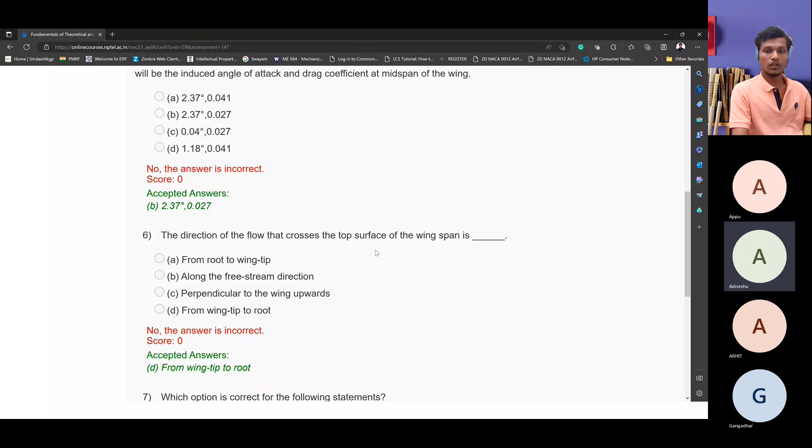Yes sir, you are sure? So I will... that one flow from leading edge to trailing edge, sir? It's not - he is not asking from leading edge to trailing edge. He is just asking how the flow will cross on the wing, whether it crosses along the span from wing tip to root, or root to tip. They are asking about the wing.

So wing means, let me clearly draw the picture and I will show you. Okay, are you able to see this PPT? Yes sir, yes. Okay, if you see an airplane wing - I'm not able to draw very neatly, but kindly adjust with me.

If you see the airplane wing like this, so this is your wing, right? Yes sir, this is the flow you are able to see. So wingtip vortices - the possibility of forming the wingtip vortices is from root or the tip? From the tip. Yes, from the tip, so the flow will move like this because of this wingtip vortices.

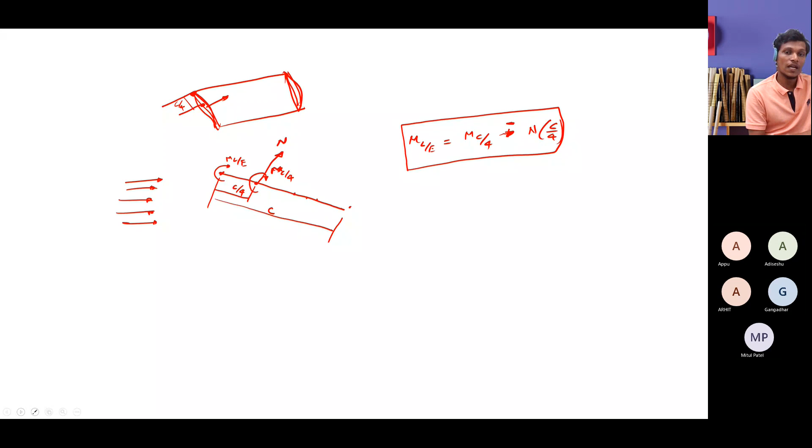Then we discussed a doubt raised by one of the students, who asked how to calculate the moment coefficient about the leading edge. In today's problem session, Professor Arnab Roy also discussed how to calculate the moment coefficient about the leading edge, and how the moment coefficient and lift coefficient together give a more detailed understanding of airfoil concepts.

So then we discussed the continuity equation in integral form, and applied it for one-dimensional problems, following certain sign conventions. We get that A1 V1 equals A2 V2, which is a very basic fundamental equation in fluid mechanics, known as the continuity equation in one dimension.

A1 V1 equals A2 V2, relating area and velocity between two points, but the conditions and assumptions behind this are very vast, so we need to carefully apply this equation. If there are experimental or real life situations where we can use this equation without significant loss of accuracy, then we can also apply it in the Bernoulli equation.

Once you apply this in the Bernoulli equation, you get a format of stagnation pressure and the relation between stagnation pressure and static pressure, like how stagnation pressure in incompressible flow converts to static pressure and kinetic energy. This is an important relation, and one should understand its derivation.

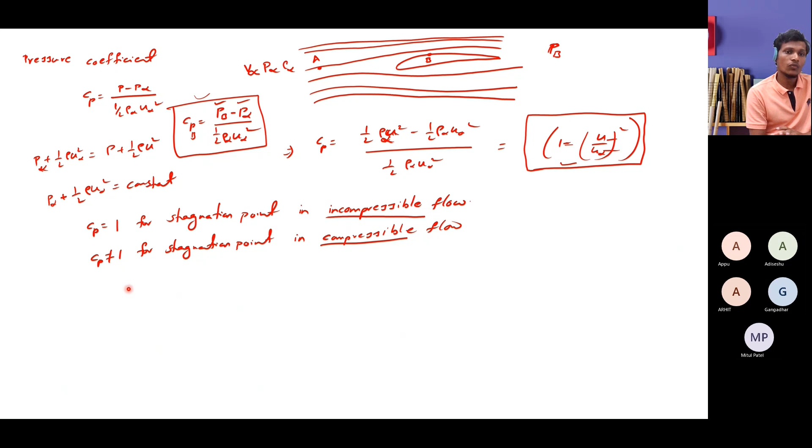Then we discussed, based on static and stagnation pressure, that instead of dealing with absolute or dimensional parameters, it is always encouraged and a common practice among aerodynamicists to work with non-dimensional parameters, like the pressure coefficient Cp.

If you have a pressure on the aerofoil, like at point A and point B, because of the properties at point A, which is the free stream with uniform flow coming onto the aerofoil, you will see changes in pressure, velocity, and flow properties on top of the aerofoil. These properties are governed by the Navier-Stokes equations, involving momentum conservation and mass conservation.

A very common definition we always use is the pressure coefficient, Cp equals P minus P infinity, divided by half rho infinity V infinity squared. And you can also include this using the continuity equation.

That is, A1 V1 equals A2 V2 for the one-dimensional form. If you include that in the Cp definition, you can also get that Cp equals 1 minus u by u infinity, whole square. This is also a formally important way of obtaining Cp.

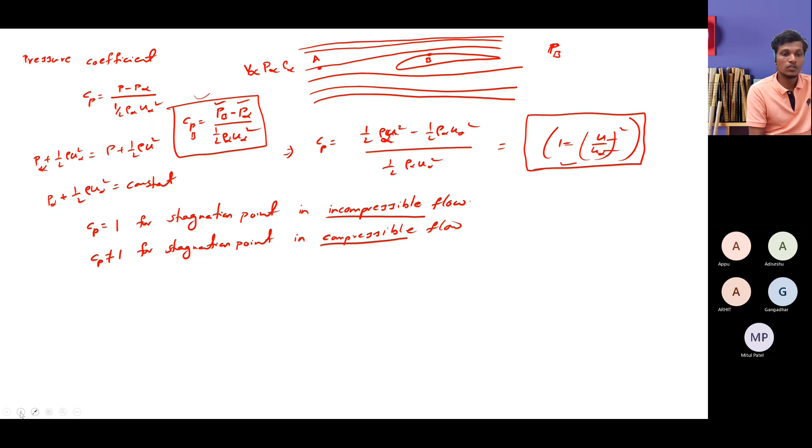I think you already covered this in the lecture sessions, but this is just a recap. If you have followed all the lectures in detail, you have already seen the application of Cp equals 1 minus u by u infinity squared in flow over the aerofoil or thin aerofoil theories, calculating the pressure coefficient in a derivational sense. You might have already gone through those lectures for better understanding.

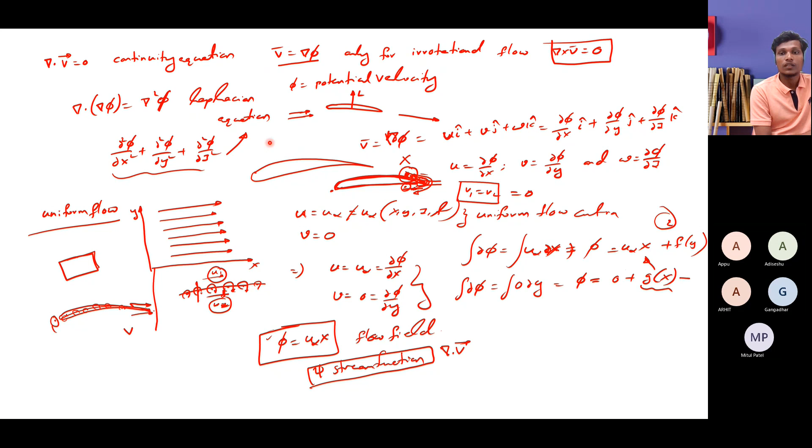Then we also discussed what uniform flow is, what the Laplacian equation is and how it is formed, and what the velocity potential is. These kinds of things were all discussed.

Now we will see today... let me take my pen. Okay. Can I use another?

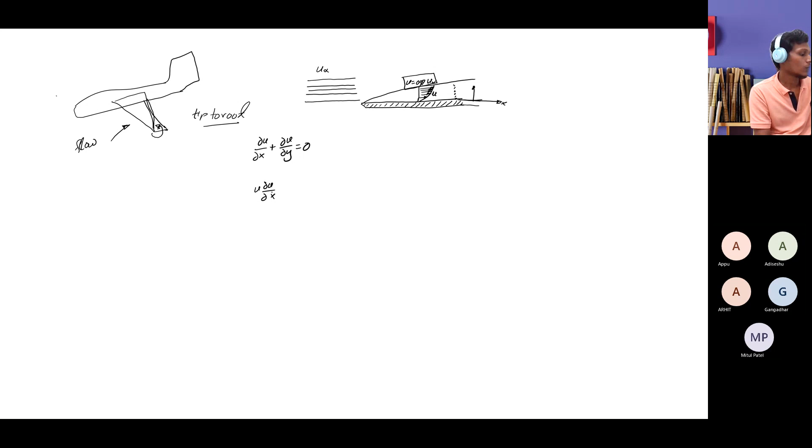The momentum equation becomes u du by dx plus v du by dy equals minus dp over dx plus 1 by Reynolds number times d square u by dy square, where this is the x momentum equation.

And for the y momentum equation, everything cancels out. Only dp by dy equals this remains for the flat plate, that is, the pressure gradient in the y direction is 0. So these are the governing equations of the laminar boundary layer.

One can solve for the boundary layer features using these equations. We can solve, and formal solutions also exist. We discussed, I mean the professor discussed in class in a very brief way, what are the solutions for these boundary layer equations.

And then for compressible flows—we were seeing these equations are valid for incompressible flows. For compressible flows, within the boundary layer, a large amount of kinetic energy needs to be dissipated, because the flow is already compressible, and the flow should reach zero velocity at this location due to the no-slip condition.

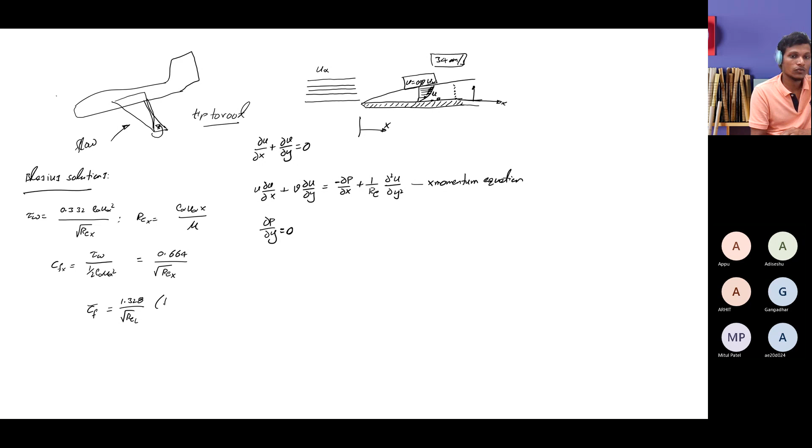In the same way, if you want the entire skin friction, that can also be modeled by complete skin friction equals to 1.328 times by local complete Reynolds number at the length of the plate. You should use x equals to L at this Reynolds number. So this will give you the total frictional force on the flat plate.

The delta, this is also a solution given, where delta means the boundary layer thickness, and the local position vector where we need the delta, that thickness of the boundary layer, is 5x by square root of Reynolds number. It can be seen that delta is proportional to square root of x. From this equation, the boundary layer thickness is very clearly proportional to square root of x.

One more important concept we should keep in mind is the displacement thickness. Displacement thickness talks about the amount of fluid displaced because of the no slip condition, or because of this viscous effect. A fluid displaces, and a streamline moving on the flat plate will get deviated like this.

Because of this deviation of the streamline, there will be a displacement of the mass flow rate in the vertical direction. This missing mass flow rate, with respect to thickness, does not represent the physical thickness. It can be represented as the thickness required to compare with the potential flow. Mathematically, it is easier to say in terms of thickness instead of marking it as missing mass flow rate. So that thickness we already formulated based upon the formal definition of missing mass flow rate, or the displaced mass flow rate.

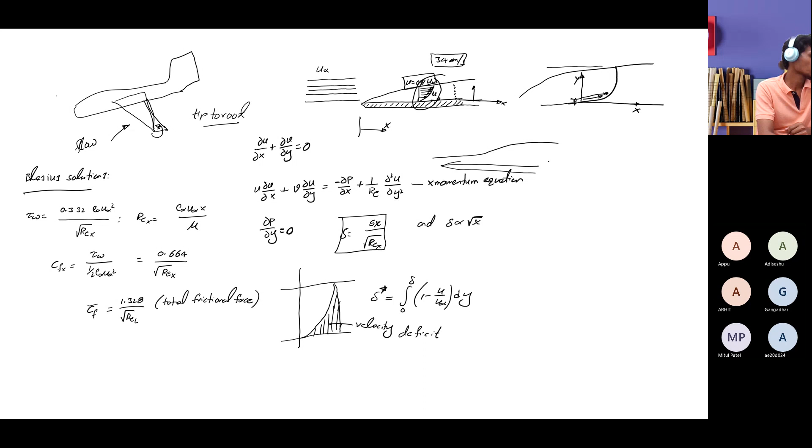For more detailed understanding, we can see these things in later lectures. The pressure drag and skin friction drag also depend on the type of profile on the body. Suppose we have two bodies, one is a cylinder with flow over it, and another is an aerofoil with flow over it. If I have these two bodies, one is a bluff body and another is a streamlined body.

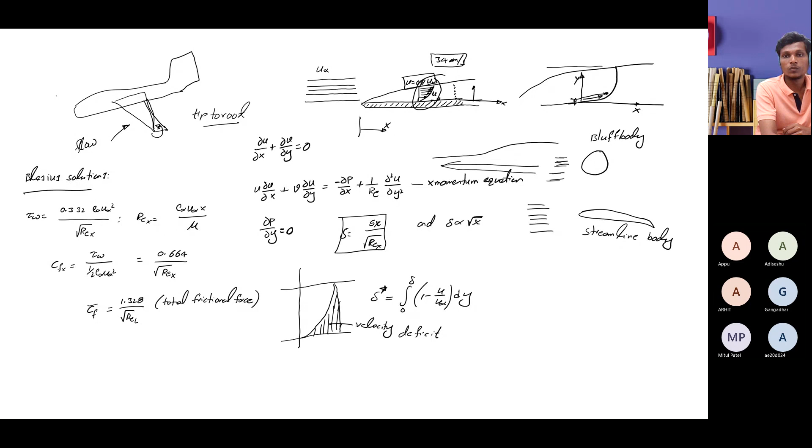Bluff body and streamlined body, if you are having these two, as an experimentalist you can see the turbulent boundary layer is the steepest, but the shear stress, which induces the viscous effect on the drag forces, is proportional to the gradient du by dy, which is very high for the turbulent case and low for the laminar case. So turbulent flow always induces a high amount of drag, but it has good characteristics, like it can sustain a high adverse pressure gradient. That means it can retain the flow attached most of the time, or for a sufficient distance on the body.

If the flow is turbulent, it helps the flow remain attached within the boundary layer for a longer distance compared to the laminar flow. That is the reason why we need turbulent flow on bluff bodies and laminar flow on streamlined bodies, because on streamlined bodies the pressure drag is dominant. If pressure drag is dominant, we need to reduce the pressure drag.

Sorry, on the streamlined body, the skin friction drag is dominant. The skin friction drag is less in laminar boundary conditions. And in bluff bodies, the pressure drag is dominant. The pressure drag can be reduced by controlling the flow, letting it remain attached on the surface for a longer period of time. If you can do that, the pressure drag can be reduced. That is possible by using turbulent flow kind of phenomena on bluff bodies.

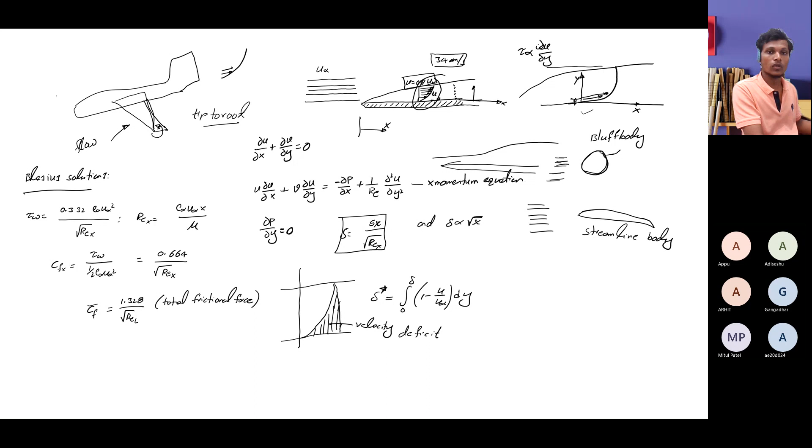Okay, the good thing is turbulent flow has more kinetic energy compared to laminar flow. Can you accept that as a formal thing? Yes sir. Yes, if you have a lot of kinetic energy... but in laminar flow the kinetic energy is not dominant. The viscous effects are a lot more dominant here.

Okay, so adverse pressure gradient is always trying to stop your flow on the surface, right? Adverse pressure gradient is very severe if you see on curved side kind of surfaces, not on flat bodies. For flat bodies, adverse pressure gradient is not present because dp/dy is already zero. For curved bodies, the adverse pressure gradient effects are very severe, and that won't allow the flow to enter or take this curvature.

My flow struggles to move on this surface, in the downward or downstream direction. So if it is struggling to move, what I need to do is increase its kinetic energy to overcome the adverse pressure gradient, right? But it is not possible with the laminar case. It is possible with the turbulent case. In the turbulent case, it has sufficient kinetic energy and it can overcome this adverse pressure gradient for some time - not all the time, but for some distance it can handle it, and remain attached for some distance because of its high kinetic energy compared to the laminar flow. So you got it?

Yes sir, yeah sir, okay. And another thing I want to ask - yes - is can you just explain the Coandă effect?

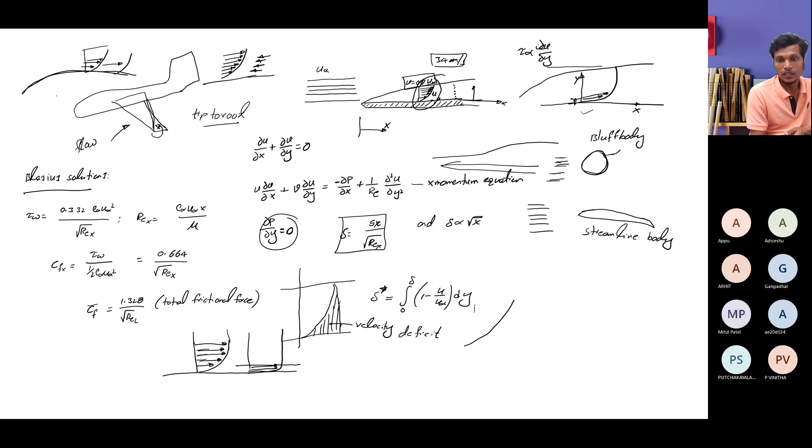The turbulent boundary layer consists of more kinetic energy, which is required to overcome the effects of the pressure gradient. Like if the flow is trying to take a turn, it will experience an opposing force, more opposing force from this side.

This is because it is already accelerated so much up to this point, and it is still accelerating up to this point, so its coefficient of pressure is almost at its lowest value. Its kinetic energy is already being dispersed or reduced because of the boundary layer effect, or the viscous effects, in the laminar flow.

Once this flow goes from laminar to turbulent, its kinetic energy is increased because of the lot of fluctuations present, as every property fluctuates in the turbulent boundary layer, and the kinetic energy also increases suddenly. Up to this level the velocity is very low, but in the turbulent boundary layer, the velocity is low only at a very small region, and in all the remaining region the velocity is significantly high. That means it is carrying more kinetic energy, which helps to overcome the pressure gradient. Are you clear?

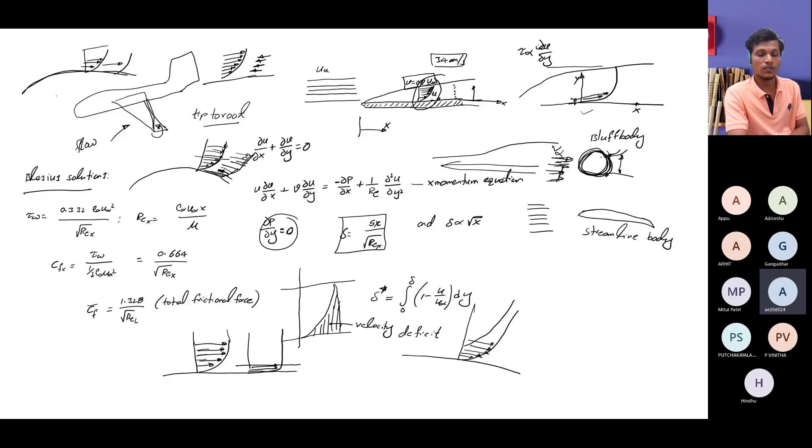But can the same phenomenon be applied for a laminar body? Can you explain how it is dangerous for the laminar body? I didn't get you—laminar body means, like, if you have the same airfoil, how is it not good? For an airfoil, it is not good.

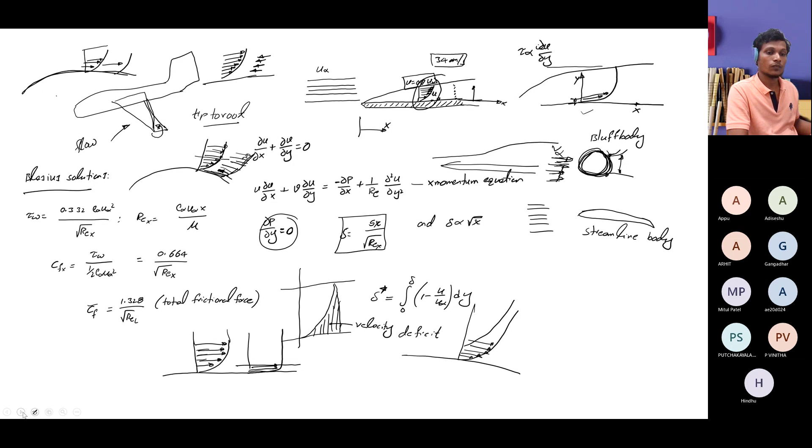Let me clarify with a new slide. I will take one more slide for you. Suppose you have a bluff body like this, which is dominant or experiencing high pressure differences. If it is a bluff body, the flow cannot sustain or remain attached for a longer distance on the surface. Suppose the distance is measured this way, starting at this point—this is ds covered on the upper surface and on the lower surface. It should start from here, from the stagnation point, so the distance covered by the fluid means the fluid should travel all the way around the cylinder.

For a potential flow, this is not a big issue because there we are not considering viscous effects. But when the viscous effects are severe, the flow starts to separate at some point, as it is experiencing less kinetic energy because of the viscous effect. So it separates at some point like this.

So when it separates on the body, the wake width—if you see this wake width—there is a deficiency of momentum. This deficiency of momentum will also create a very low pressure zone, because the flow is already separated here and it is not covering this portion. Here you can see a free stream pressure.

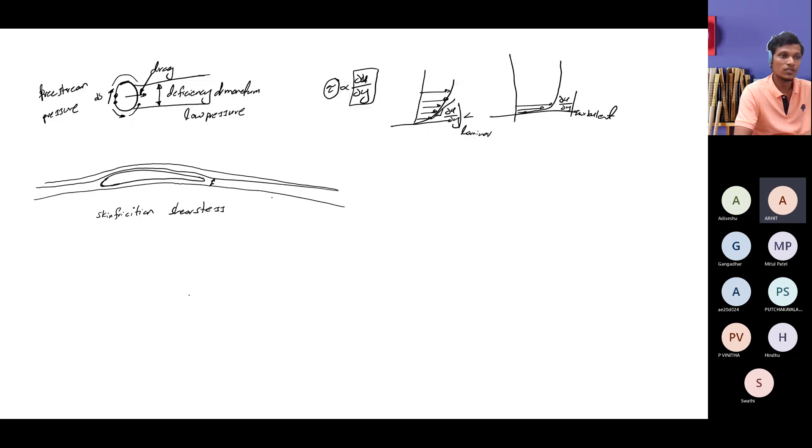So now I think we can go to our problem solving session, sir, no doubts. Last, yes sir, yes last, yes. Who has a question? I have, sir. Audit sir, Arhit, yes tell me. Sir, this laminar boundary layer and this formation of pocket in airfoils, sir can you explain? Laminar boundary layer is the pockets of - the pocket forming in the airfoil, sir, due to laminar boundary layer. Pocket forming, or you're talking about separation bubbles? Yes sir, separation bubble, separation bubbles we talk. Is it already discussed in the classes? Yes sir. Like you are interested on it? No, no sir, it was discussed in the class. Sir, I could not understand this topic actually. Okay.

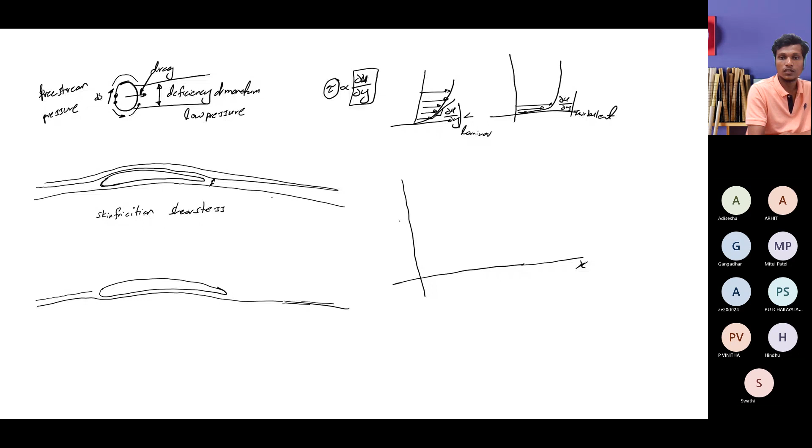Suppose if you have a boundary layer like this on the aerofoil, at low angle of attacks, the flow is able to sustain the adverse pressure gradient. If you want to better understand the adverse pressure gradient, I suggest you always plot the pressure coefficient diagram on the surface, and it looks like this. If you draw a pressure coefficient along the chord line, suppose this is your chord line, denoted with X, and this is your CP.

It depends on what kind of aerofoil you are using, so I've just drawn a general profile of a CP distribution on the surface. This is a CP distribution - you see at the very starting point of your leading edge, there is a sudden drop off, it should go to the negative level. This is a negative CP, a very sudden drop of CP at the leading edge, because of high acceleration of fluid on the top surface.

Because of this high acceleration, the fluid pressure at that point decreases very large, meaning CP tends to more negative. In the potential flow region, above the boundary layer, the velocity is very high. But in the laminar boundary layer, the velocity is not that high because it is already zero, and CP is very low.

Consider a free stream pressure or local pressure at a point where velocity is very low, and CP, the local pressure, is also very low. So to move the flow from one point to another, in the potential region it has kinetic energy and can move in that direction, but in the boundary layer region, it cannot move.

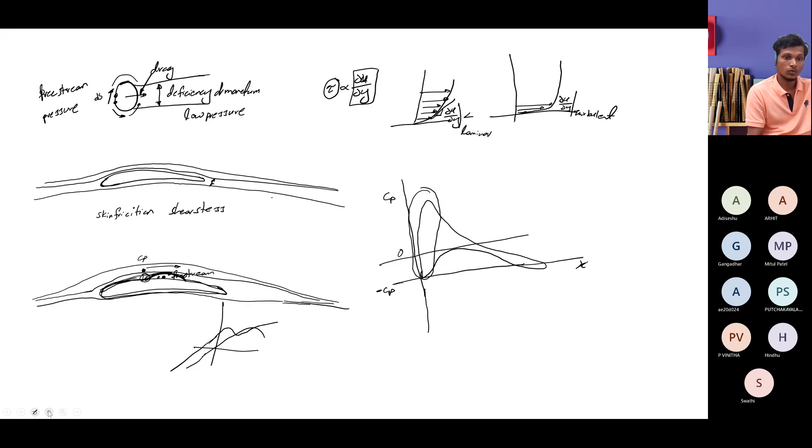So let us go to our problem solving session, where we try to solve a few problems regarding the discussion we have done so far. This also includes the past discussions. The past lecture contents are also very necessary to solve the problems in the present or future assignments. I believe this recapitulation of concepts will help you solve both present and future assignment questions. So please concentrate on the concepts I'm discussing here.

And the first question is, which equations are essential for obtaining - let me show you the question, sorry. Yeah, this is our first question. Which equations are essential for obtaining the solution to an incompressible isothermal flow field?

The question is stating two important conditions about the flow field: the flow field should be incompressible and the flow field should be isothermal. If the flow field satisfies both these conditions, we can solve the flow field, meaning we solve the governing equations - the simplified Navier-Stokes equations based upon these two conditions, or the simplified continuity equations.

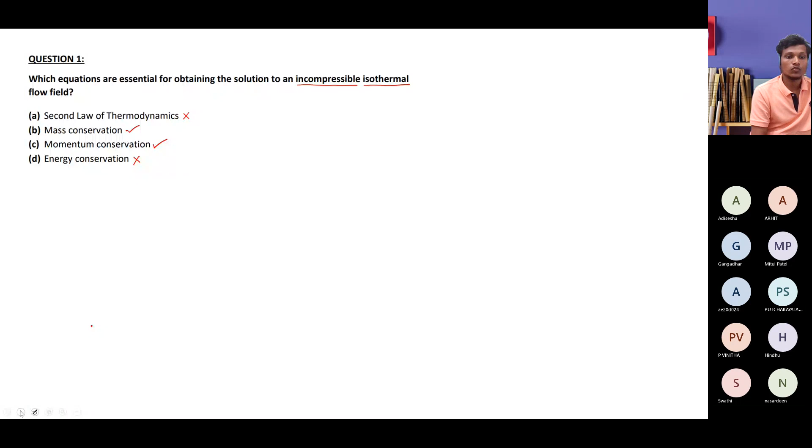The next question has two statements. The first one is: in rotational flow, Bernoulli's equation is applicable only if the points of interest are located on the streamline. Recall the conditions or assumptions we discussed for the Bernoulli equation earlier in the lectures. The second statement is: in irrotational flow, Bernoulli's equation is applicable everywhere in the flow field. If the flow field is irrotational, the Bernoulli equation is applicable everywhere in the flow field - yes, this statement is correct. And for rotational flow, Bernoulli's equation is applicable only if the points of interest are located on the streamline - yes, both statements are correct.

Let's go to the next question.

Here, which option is correct for the following statements? We again have two statements, where the first statement says that in an inviscid incompressible flow, as the flow speed increases, so does the kinetic energy and dynamic pressure. We have the conditions of inviscid and incompressible flow, and as the flow speed increases, so does the kinetic energy - yes, kinetic energy is proportional to velocity, so kinetic energy K equals half mv squared, so kinetic energy also increases. Dynamic pressure is just the kinetic energy per unit volume. So the question is asking which option is correct - this first statement is correct.

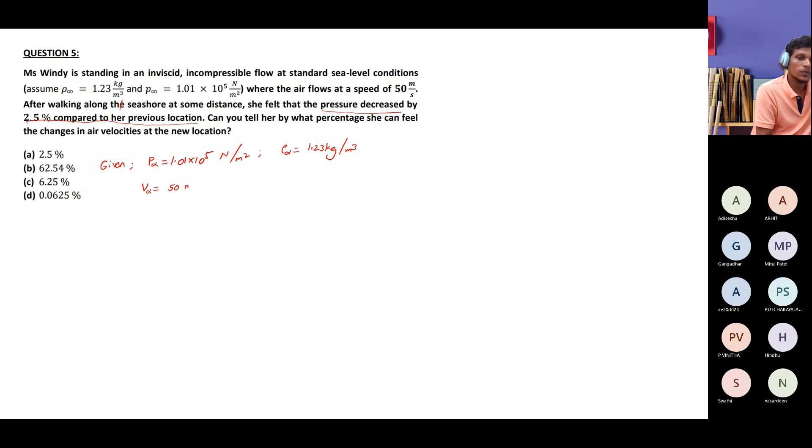So we need to find how much change in percentage in air velocity compared to the new location. We also have incompressible flow, inviscid, so we can directly use the Bernoulli equation.

I always suggest you must note the conditions also, like whether it is incompressible or compressible flow, viscous or inviscid. If those conditions are not properly stated, you should define them by some good logic, whether it is really applicable to Bernoulli flow or not, using the given details.

Since they have already given these conditions, let's directly use the Bernoulli equation: P infinity plus half rho V infinity square equals P plus half rho V square. This is the Bernoulli equation for incompressible flow.

Then we should define what parameters correspond to what position. The right hand side terms, P and V, correspond to the new location. Suppose this is the old location and this is the new location.

The difference in pressure from old location to new location is 2.5%. We should use that to obtain the pressure and velocity difference from new location to old location. That means the change in pressure, this old location P infinity and new location P, with respect to the old location, is 2.5%.

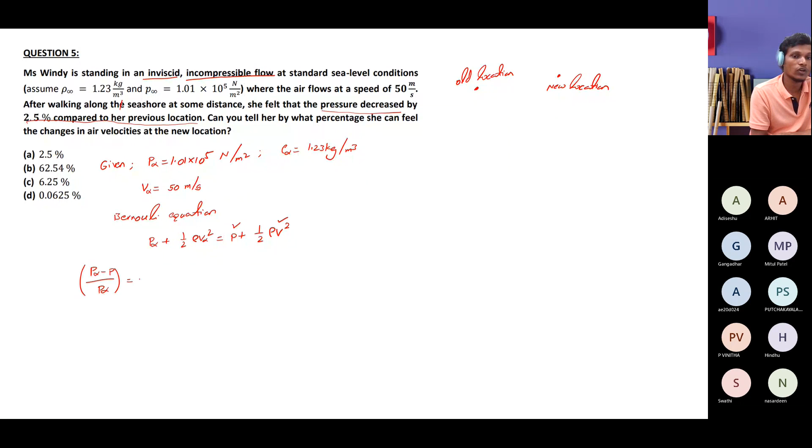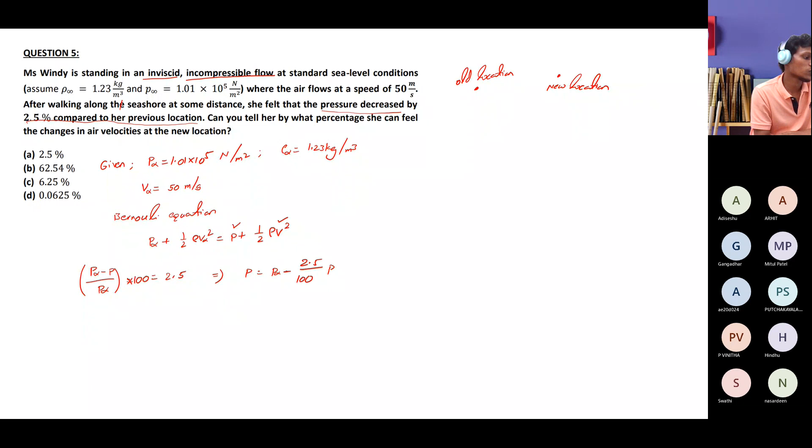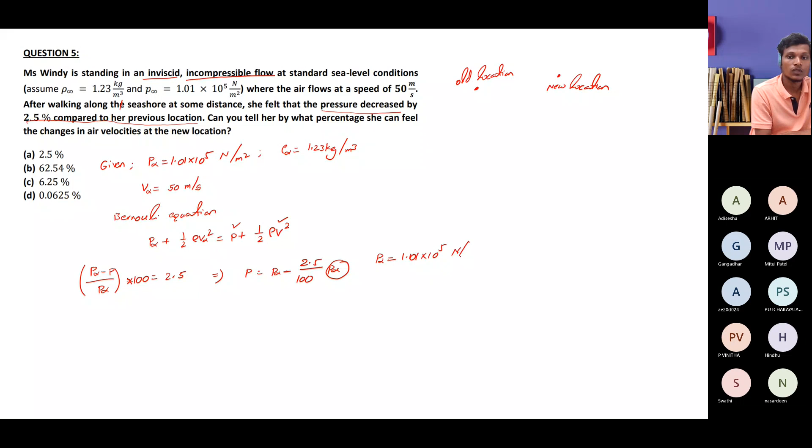If you solve for this, you get P equals P infinity minus 2.5 by 100 times P infinity. Since you already have P infinity equals 1.01 times 10 to the power 5 Newton per meter square, substitute it in. Once you substitute, you get the new location pressure value as P equals 98475 Newton per meter square.

Now you have the pressure value at the new location and at the old location, but you don't have velocity at old and new location. With the available values, let's substitute those into this equation.

We have P infinity equals 1.01 times 10 to the power 5 plus half rho V infinity square, which we don't have, and this equals P, which we already calculated as 98475. Let me write this.

That is 98475 plus half rho V square. We already have the density also. The density won't change because it is already stated as incompressible flow. So 1.01 times 10 to the power 5 plus half, substitute density equals 1.23. There is no rho infinity versus rho difference because it is an incompressible flow field. And this is the new pressure.

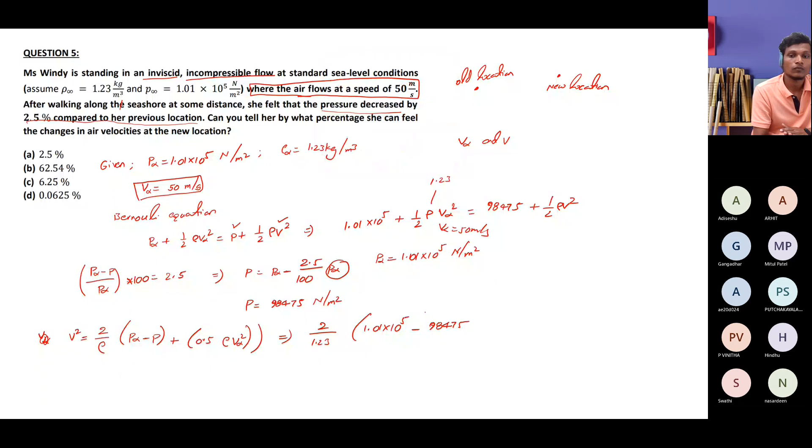98475 plus 50 square gives you 6605.69. If you take the square root, you get V at the new location as 81.27 meters per second. But this is not the end of our question, we need to find the change in velocity.

The change in velocity means percentage change in velocity with respect to the old location. If you substitute the new velocity value and old velocity value, old velocity equals, you will get 62.54 percent change.

One important note: observe the pressure difference. We have the pressure difference, that is P minus P infinity by P infinity into 100. The change in pressure is only 2.5 percent, but the change in velocity is around 62 percent. This is very interesting, a small change in pressure of 2.5 percent, not even significant, leads to such a large change in velocity.

You have a velocity change of around 62.54 percentage, and this is what causes large hurricanes and environmental disaster kind of situations, where the pressure drop is very low but the velocity difference is very high. Why is this happening? Is any other term also responsible for it? For this much of pressure difference, there is a large difference in velocity.

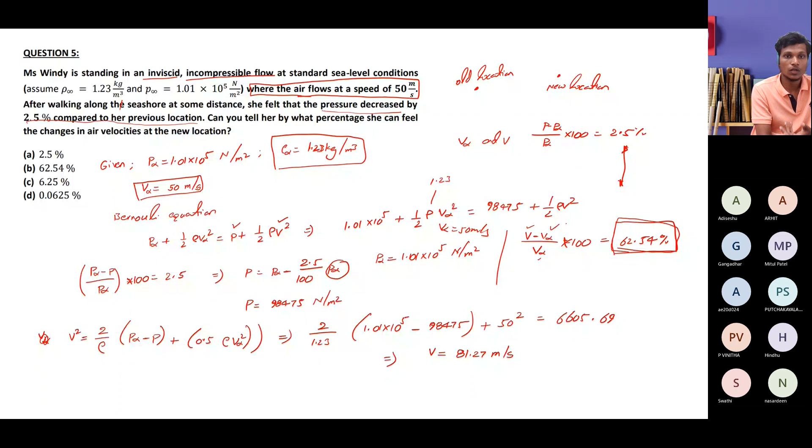Yes, one more parameter that is responsible is the density. For high density fluids like water, mercury, or any other fluids, even though there is a very less pressure difference, the velocity difference is not very severe. But for very less density fluids, like air at 1.23, you can see this much of velocity difference for a small change in the pressure. If there is a local pressure difference at the surroundings, you will feel a sudden high wind kind of situation.

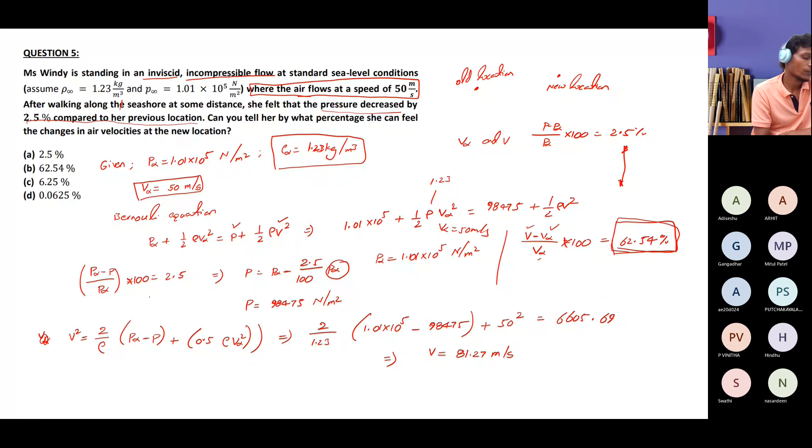Okay, so this gives the solution of this question.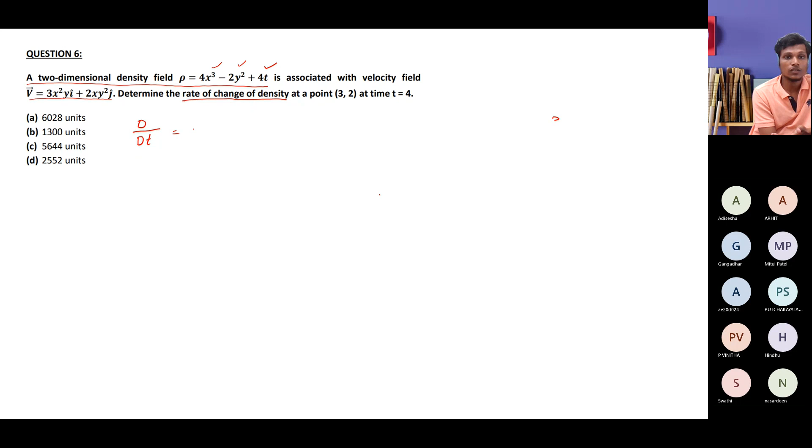The question is about rate of change of density. At the very beginning of the discussion we already saw how we can write the rate of change of a parameter in a substantial format, based upon its local and convective acceleration: d/dt equals u dou/dou x plus v dou/dou y plus w dou/dou z plus dou/dou t. Whatever the parameter is, we should substitute here.

Suppose for our case it is density, so I will substitute it as density. Since it is only two-dimensional, we are not going to consider the w term. We eliminate this, and the rate of change of density will be u dou rho by dou x plus v dou rho by dou y plus dou rho by dou t.

Now, from the velocity field, u equals 3x square y, v equals 2xy square. These two are sufficient because we need only u and v. Then just substitute these things, and we also have rho. Let me substitute the details.

If I substitute the details, I have u equals 3x square y, and dou/dou x of 4x cube minus 2y square plus 4t, plus v equals 2xy square, and dou/dou y of 4x cube minus 2y square plus 4t, plus dou/dou t of the same rho value. I write it as rho to save space. Simplifying, 3x square y times dou/dou x of this gives 3 times 4x square. Plus 2xy square, if you simplify this, gives minus 2 times 2y. Plus, if you substitute that rho value in the time parameter and simplify, it gives value 4.

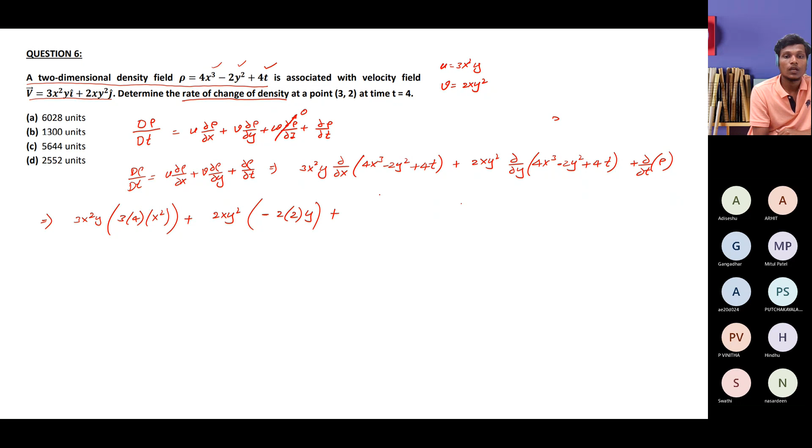Okay, now we have only the x and y values. We have x equals 2 — I'm not going to simplify this as this is a simple algebra problem — x equals 3, y equals 2, and time t equals 4 units. They did not give the exact units, so we are dealing with units only.

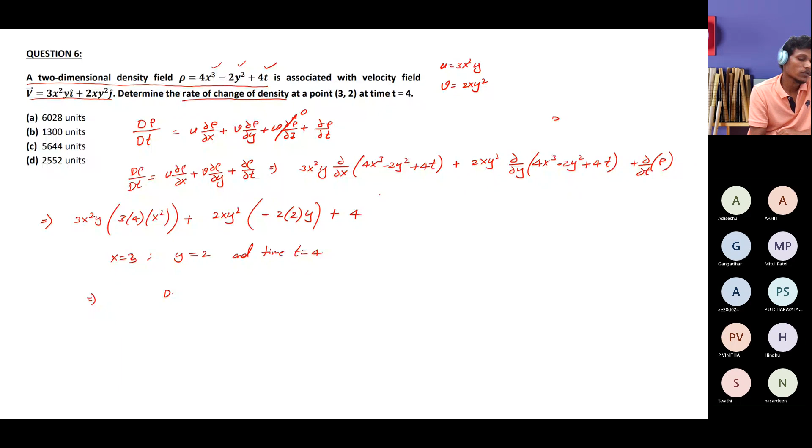So just substitute these values in that equation. Upon the simplified format, d rho by dt equals 4 plus 36 x power 4 y minus 8xy cube. Now substitute in this, and you will get the final solution as 5644 units. So this is the solution for this question.

The substantial derivative — though they asked for the rate of change of density — is a good example for one to understand the importance of the substantial derivative. Let me physically show you what's happening here.

Suppose this is your x and y field, and the density is varying, you can assume that it is varying in the third dimension, that is in the z direction. Consider the density at this point is like 10 kg per meter cube, or 10 units.

If you assume that the flow is steady, with no unsteady phenomena, density still changes from place to place, from here to here, suppose to 12 units. This change in density in the spatial coordinates is given by these two convective parameters.

Density also changes. It cannot be 12 just based upon the xy plane. Density also changes with respect to time. Suppose this xy plane is considered at the 10th second.

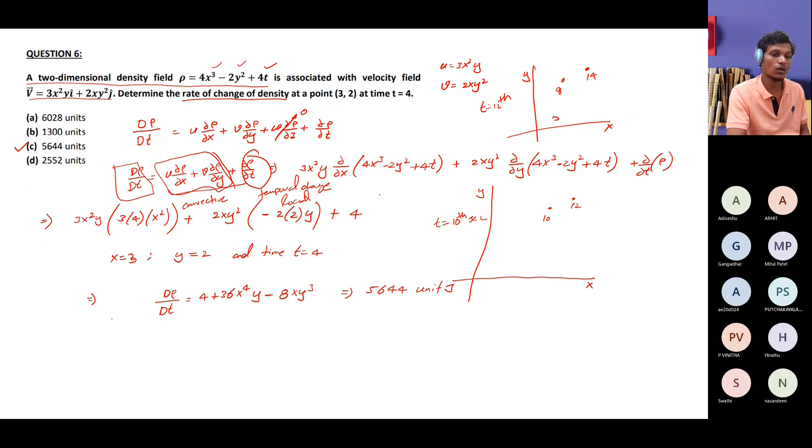That is why it is very important. If we want all the details, we need to see both the time parameter and the spatial parameter of the variable. Unless we do, it won't give you all the clear information.

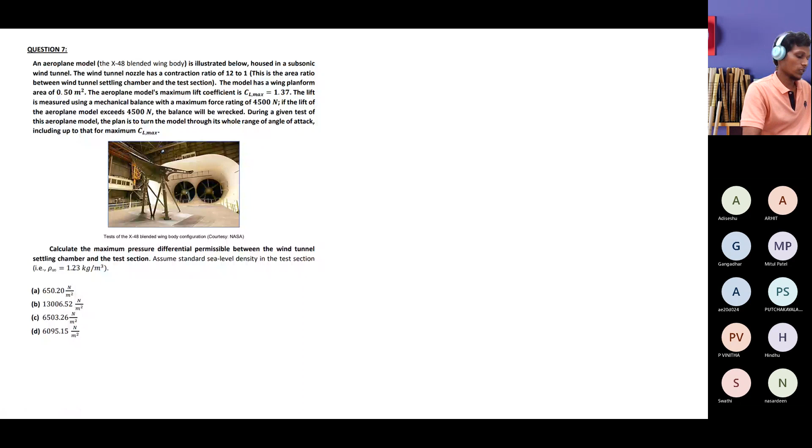Next question is about a wind tunnel, a very large wind tunnel. Tests of the X-48 blended wing body configuration, courtesy NASA. An aeroplane model, the X-48 blended wing body, which is the aircraft, is housed in a subsonic wind tunnel.

That is, the flow is less than the sound velocity. If the flow is more than the sound velocity, we call it supersonic velocity. If the flow is less than sound velocity, then we call it subsonic velocity.

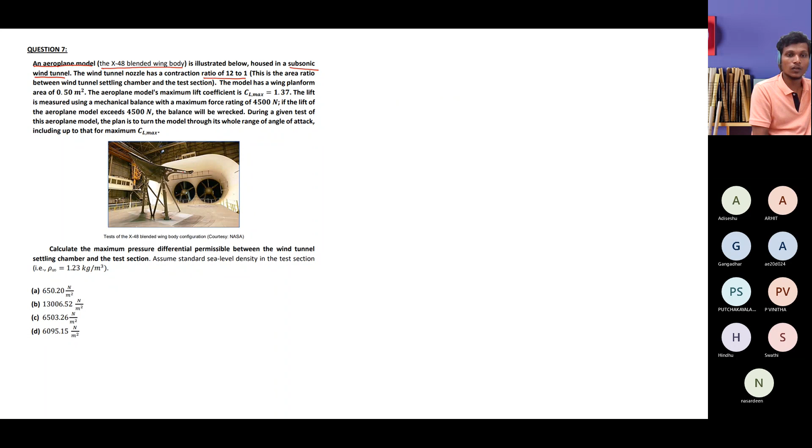The wind tunnel nozzle has a contraction ratio of 12 to 1. Let's not worry about what the wind tunnel nozzle is, but there is a contraction ratio of 12 to 1, meaning there is a change in area. Suppose where the aircraft is placed the area is 1 unit; the free stream, the upstream area in front of this aircraft, is 12 times greater than the area surrounding the aircraft.

That is what we call the area ratio between the wind tunnel settling chamber and the test section. I hope a basic level introduction of this wind tunnel, its settling chamber, and its test section has already been given by the professor, so I'm not going into details. If you are unaware of it, let me know.

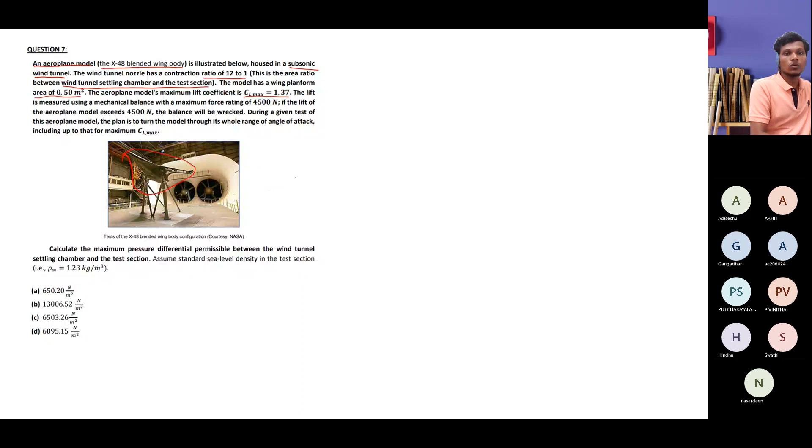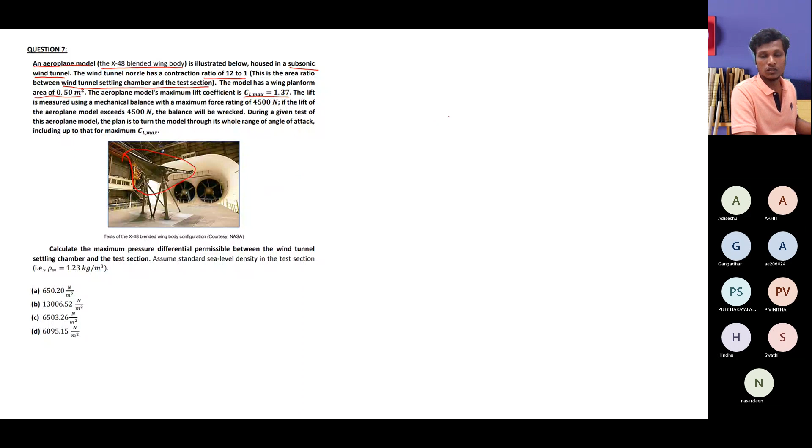So this is a lengthier question to read, but if we have a good exposure of the wind tunnel, or how we test airfoils or aerodynamic streamlined bodies, it is very easy to understand. It's like a simple kind of question. So I will just draw for your understanding what a wind tunnel is and how the test section is, and what are the parameters being described here.

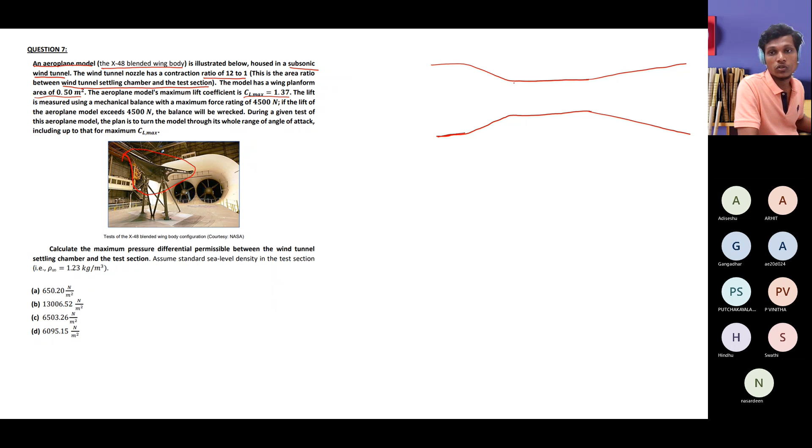A wind tunnel more or less looks like a convergent divergent nozzle, and this particular portion is your test section. There we place our model.

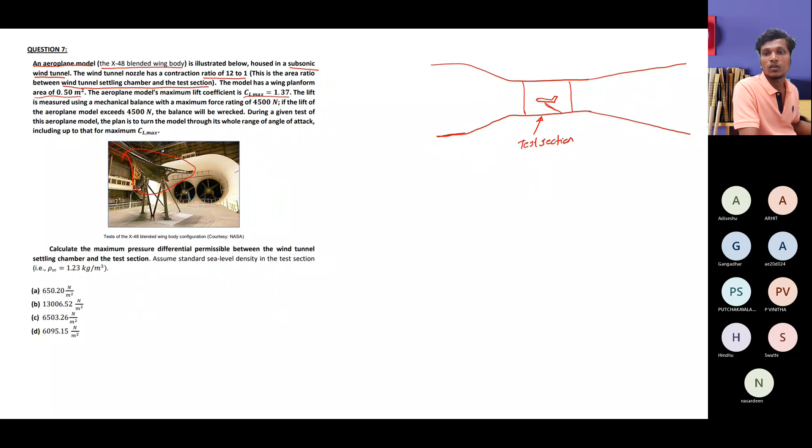This is where we place our model, and we used to have a kind of mechanism here. This is a weight balance, and here is your settling chamber.

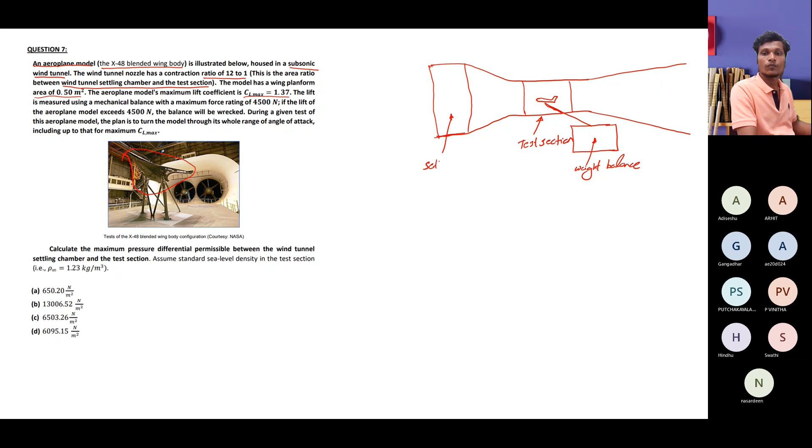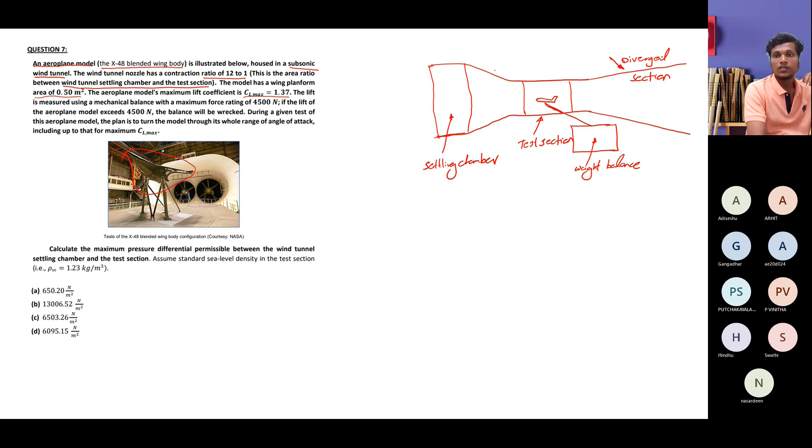Where the velocity is very low, almost negligible, and your pressure is very high, that is total pressure. And this is your divergent section. So this is settling chamber, test section, and divergence section, and this is the convergent section.

Now, a flow is happening over this aircraft. This is your testing object, we call it the object that we are going to test, or the specimen or testing object. This body we are going to test in this wind tunnel, instead of testing in real-time experiments and real-time situations, which is very difficult. We create an environment like this, such that because of this contraction, they state this is 12 times.

If this is the area, the cross-sectional area, if you see from this view, the area you see is 12 times the test section area. So if it is 1 time, this inlet area is 12 times. So that is what they gave, that is the contraction ratio.

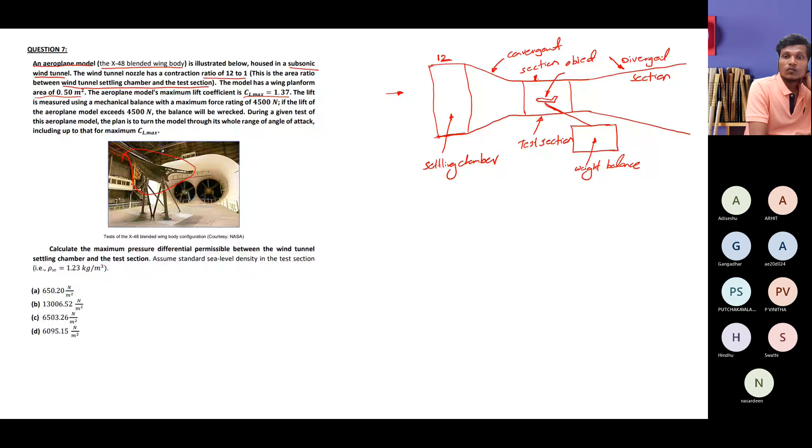And then this is your convergent section, because if you create any convergent zone like this, your fluid accelerates in this convergent zone as long as this convergent zone is present. Then the accelerated fluid is allowed to pass through this horizontal throat region, or the test section region. Here the walls are parallel, so your flow won't accelerate further. It will accelerate up to this region, and the velocity after this is uniform velocity.

Why are we creating such a uniform velocity? Because aircrafts fly at some altitudes in a uniform velocity, meaning the incoming flow is not happening like the real-time situation. We are creating the same thing in the opposite way, by maintaining our aircraft steady and letting the flow come on top of it or ahead of it. It is like we are replicating the same situation by forcing the air at the same speed of the aircraft as it does in the real-time situation.

But in real-time situations, the flow speed is very high. To recreate the same situation, we use a non-dimensional parameter, that is Reynolds number. This helps to recreate the same similarity of values. For instance, if the velocity of the aircraft is 1,000 kilometers per hour in real time, you don't need to create the same velocity in the test section. Based upon the Reynolds number and the flow, using density parameters, you can do the dynamic similarity analysis, and apply lower velocities compared to the real time situation. That comes with dynamic similarity. To not deviate more from our topic, I'm not going to deal with that.

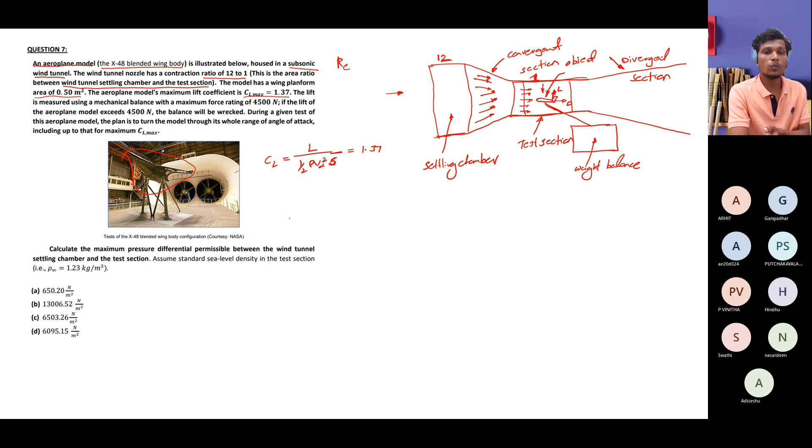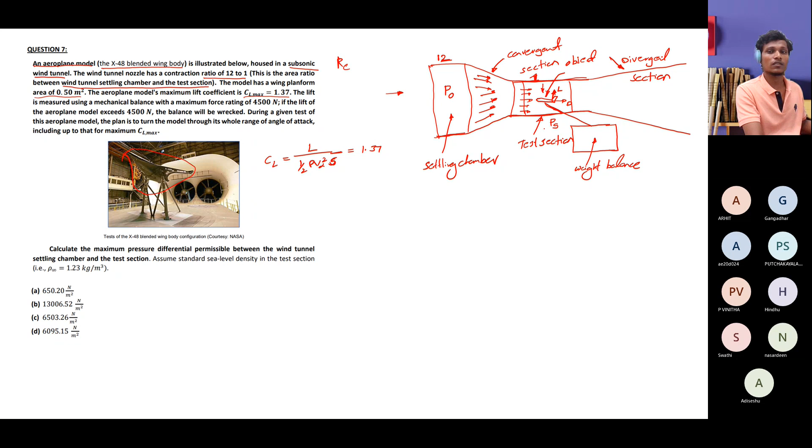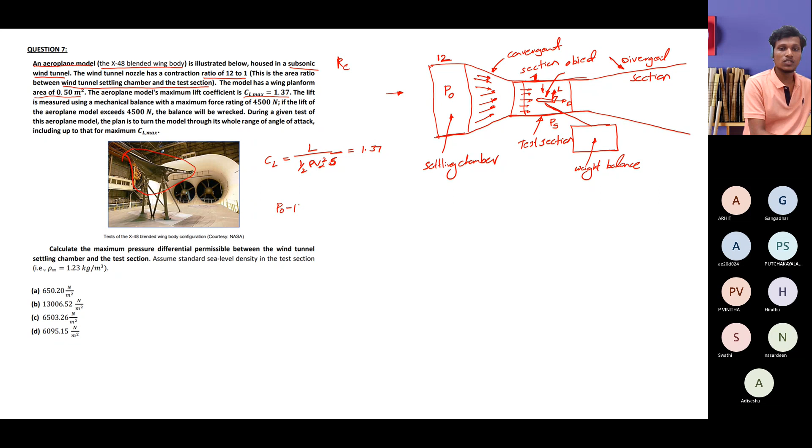Now the question is, what is the permissible pressure difference we can allow between the wind tunnel settling chamber, say it is P naught, and the test section, say it is Ps, the static pressure at the test section. The question is how much pressure difference, that is the difference between P naught and Ps, can we allow? Then how do we calculate that?

It's an interesting thing to know. It's a question given as a subsonic wind tunnel, whether I can apply the conditions of Bernoulli or not. That is the initial question you will get. So let's see how you can apply it. If you can apply Bernoulli, how the solution will vary, and how much pressure difference you can create to reach the maximum CL of 1.37.

Let me write the given details of this question. The contraction ratio is between A1, the area at location 1, and A2, the area at location 2. A1 by A2 equals 12. The planform area S equals 0.50 meters square. CL max equals 1.37.

Is it a maximum weight they gave? Yeah, it's not a maximum weight, it's a maximum force rating of 4,500. This weight balance is like a weighing machine that can sense a maximum value of 4,500 newtons. If it exceeds 4,500 newtons, the weighing machine will get damaged. So we should limit our calculation such that the weighing machine stays within 4,500, then find what amount of pressure difference we can create.

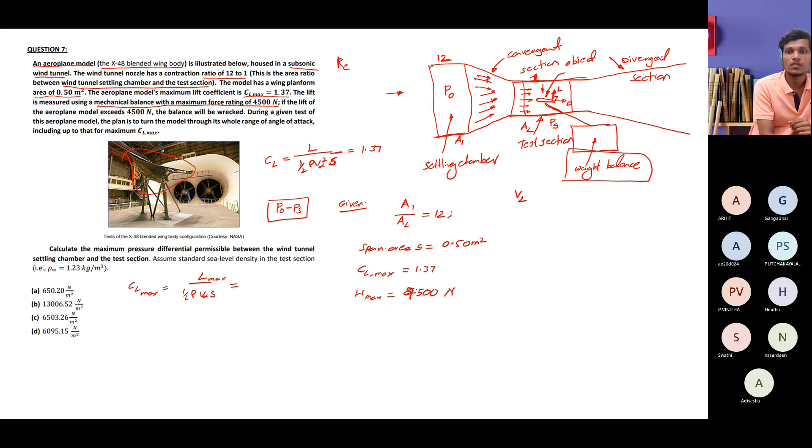Given this condition, the first thing you need to get is the velocity difference. If you can get the velocity at area 2, you can take the velocity at area 1 as more or less zero, because that velocity is very insignificant, very low, since the pressure is very high and velocity is very low there. So you can set the velocity at the settling chamber as 0, and the velocity at area 2 is what we need to calculate.

From that velocity difference, we use the Bernoulli equation, since we've only learned Bernoulli so far, assuming the velocity differences are not so significant. We are not yet aware of the theoretical treatment of high speed flow, like how pressure and velocity are coupled in high speed flow, so let's just apply Bernoulli. We can apply Bernoulli and get the pressure difference between P naught and Ps. But how do we get the velocity at section 2?

If you want to get the velocity at section 2, the details you have are from CL max. From CL max, they state that you can reach only up to the CL max of 1.37, and you can reach up to a weight of 4,500 newtons.

So now you have this weight, which means the maximum lift generated by this aircraft. If this aircraft generates more than 4,500 newtons, the force sensor or weighing machine cannot sense more than that, or it will get damaged. So let's limit this lift, because whatever lift is generated by this aircraft will be sensed by this weighing machine, so it should be limited to 4,500 newtons.

And then CL max is 1.37 equals to 4,500 divided by half, times density. Since we are going to use the Bernoulli equation, we should keep our density constant, and that is 1.23 kg per meter cube, already given to us.

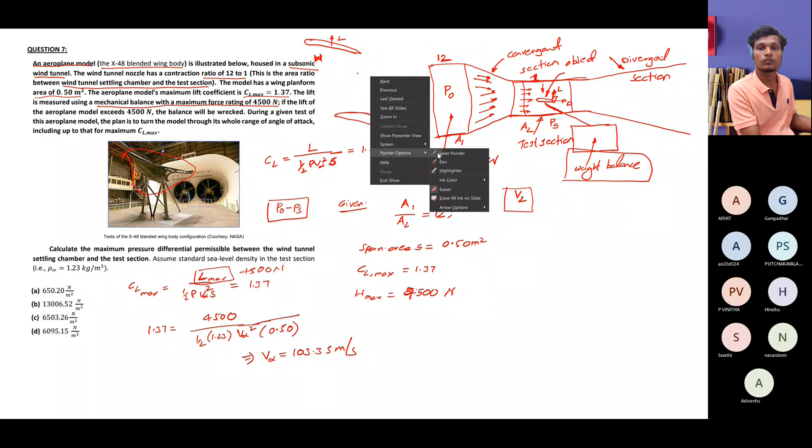Suppose this is the lift created by your aircraft, and this is your weight, the self weight of this aircraft - both should be balanced. If it is not balanced, the aircraft will fall down, or if the lift is too high, the aircraft will continuously go up. Both things may happen based on any force difference, so both should be balanced.

If weight equals lift, your aircraft needs to be balanced in such a way that at very low velocity I want to fly. That means if you don't have very high power, you cannot go at high velocity, like in engine failure cases. If the engine is not working properly, you cannot propel the aircraft with high velocity.

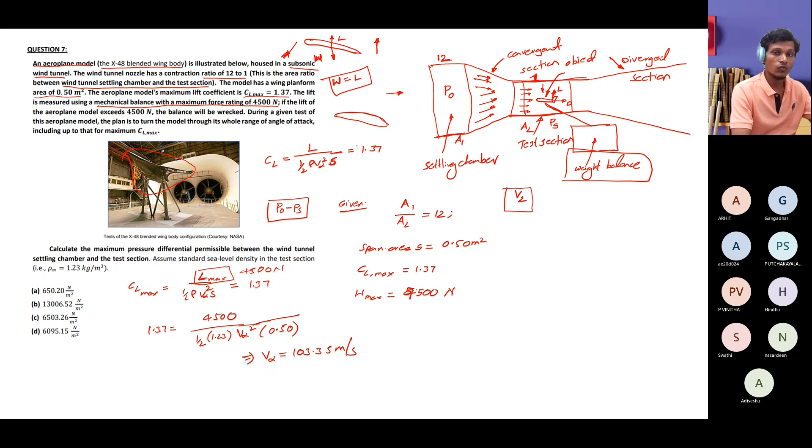So in that situation, what is the minimum required velocity that you need to maintain for your aircraft to stay at force balance, where weight equals lift? That means it neither falls down nor goes up. So that lowest possible velocity - I definitely need to maintain a velocity of 103.35 meters per second to keep my aircraft at that balance of weight.

So this is why we call it stall velocity. If I reduce my velocity below this, my aircraft will start falling down. If I increase the velocity more than this, I need to consume more fuel, and the lift will also go up, and the aircraft will move up. So this is the minimum velocity, or stall velocity, as we call it in our terminology - a very important and key aspect.

Now from continuity, applying to the one-dimensional case, we already saw A1 V1 equals A2 V2. We have the area ratio A1 by A2 equals 12 is to 1, so I can get the ratio of V2 by V1. If I reshuffle this equation, you will get V2 by V1 equals the same ratio.

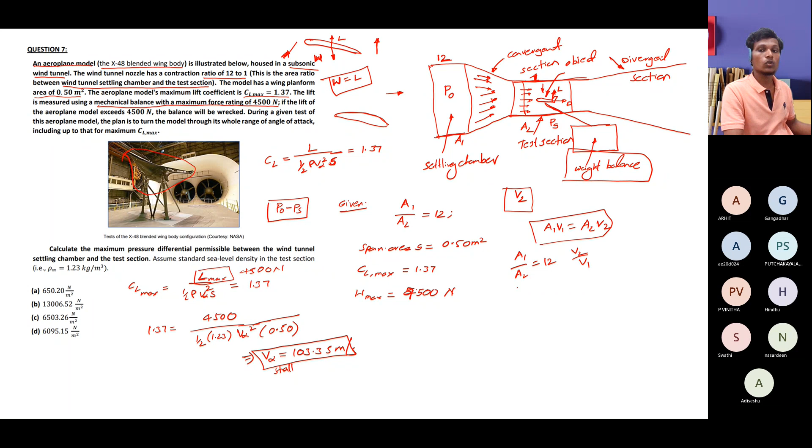But you already have V2, the velocity in the test section - we just obtained that, V2 equals 103.35 meters per second. From this, you can obtain V1, and if you simplify that, you will get some value.

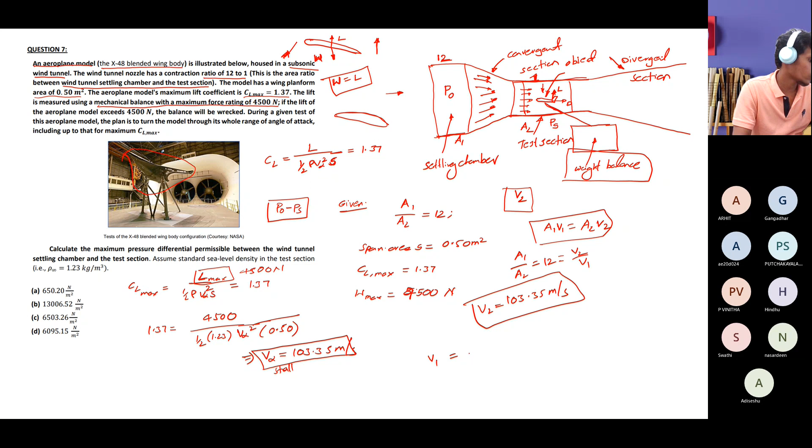Shall we solve for this? I think I did not mention that V1 equation here. One good way of doing this is to directly solve for V1, since you already have V2 by V1 equals 12, just solve for V1. As you know, the pressure difference is what we need to calculate, that is P naught minus PS, which equals half rho times the difference in velocity squared.

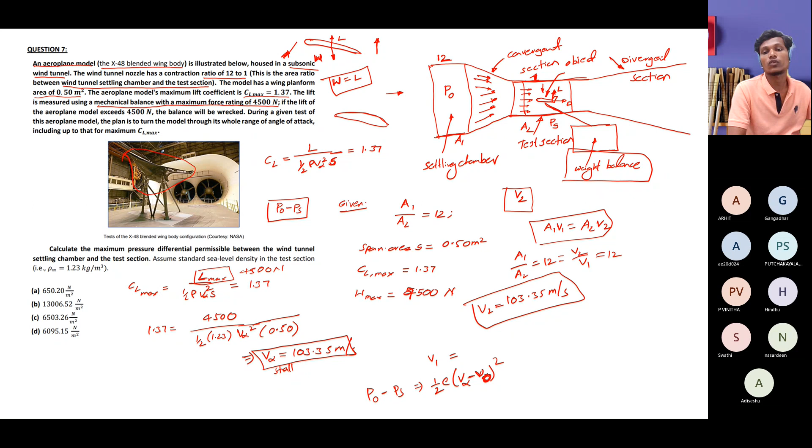If you simplify the Bernoulli equation, they asked only for the pressure difference. So you can solve the velocity from here, that is V naught, velocity in the settling chamber. That is also V naught equals to V1, don't get confused.

V naught equals to V1, solve for the V1 as V2 by V1 equals to 12, and substitute in this, so you already have V infinity as 103.35, V1 you can get from this, and density they already given as 1.23 kg per meter cube. Simply if you substitute, they only asked for the pressure difference, you will get the P naught minus PS.

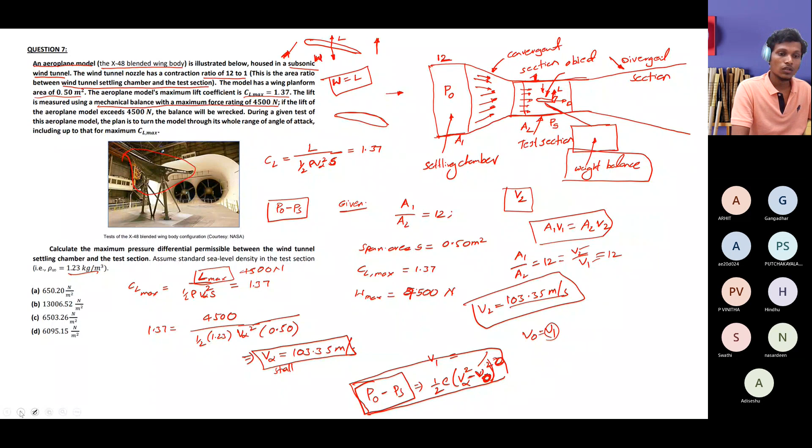But one important simplification of the Bernoulli equation that you can use for later sessions also, I wrote here, which is helpful for you. Our question is already solved, but one more method, I am just substituting the continuity equation and Bernoulli equation, and I will couple it, so that later on you can use it. So I will discuss that.

Suppose your Bernoulli equation is like this: P1 plus half rho V1 square equals to P2 plus half rho V2 square. This is your Bernoulli equation. Let's simplify this Bernoulli equation for V2, that is velocity in the second point.

V2 square equals to 2 by rho times P1 minus P2 plus V1 square. If you simplify this equation for V2 square, now V2 square is equals to, I can write like this. I will directly write and show you how and why one can write like this format.

A2 by A1 square, V2 square. How can I write this? We have A1 V1 equals to A2 V2, we already discussed this. And here we have V1. If you solve for V1, what does it show? A2 by A1 times V2. But we have V1 square, so just substitute the square of it. So I just substitute that continuity equation.

Now we have A1 by A2 equals to 12, that is a contraction ratio. I will call it some constant. So whenever you see any contraction ratio in your problems, it is very good to write in this format. You can just directly substitute that A1 by A2 equals to 12.